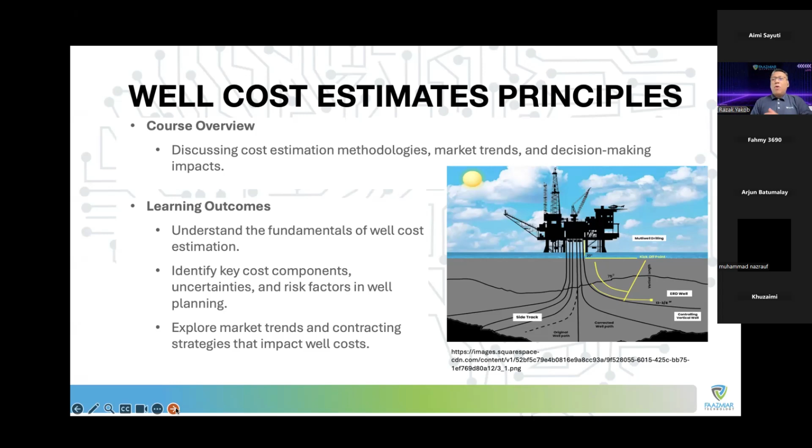Because well planning, you will provide the time, and inside the time, it basically will equate to the cost itself. So we'll explore the market trends and also the contracting strategies. So for you guys, the proposal engineer, this is actually very much related. And I hope all of you will benefit from this 2 hour session.

This is what we're gonna be covering: the necessity and complexity of the well cost, the components, and the method and decision making, as well as what basically is the trends that we have right now on the well cost. And then hopefully all of you can actually benefit from this.

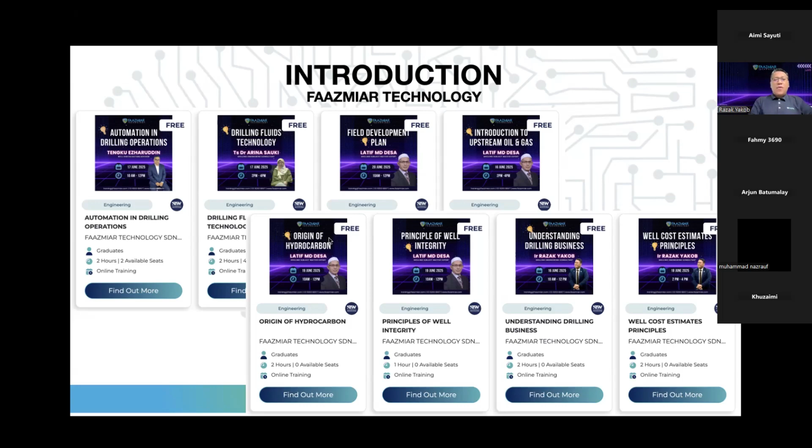We also have introduction to upstream oil and gas, origin of hydrocarbon. So if you would like to know what's going on with the upstream industry of oil and gas, here is all the availability of knowledge that you can actually get. Of course, we have the principle of well integrity. I think one of you, Nair, is very much related to this particular topic. Then, of course, I did the Monday session on understanding the drilling business, as well as right now we are having the well cost estimate principles. I hope all of you will benefit from these sessions that Faazmiar Technology is actually providing you.

I do realize as well, it's like 2 o'clock, 2 plus PM, and it is time after your lunch, and everyone is kind of like a bit sleepy. So I do understand that. But we will do a 5 minutes break at 3 o'clock so that all of you can actually rest a little bit. But from now until 4 o'clock, we try to finish up the items that we cover over here.

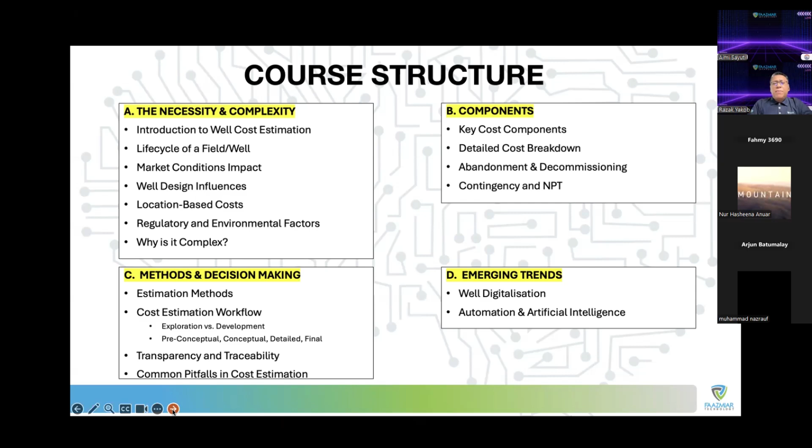All right, let us take a look at the necessity and also the complexity of the well cost estimates. First and foremost, why is it important? Why is accurate cost estimation important?

Because as I mentioned just now, whatever number you put inside your cost estimates will translate into whether the project actually flies or not, whether the project will be sanctioned or not. If you simply put in any number that you pluck from the air without justification, and if your reviewer didn't question you, and the number actually went out there and the project is sanctioned, then you probably will have issues later trying to justify if your cost didn't actually meet the actual work that has been done.

Because, as I mentioned, whenever you require additional cost to supplement your budgeted approved cost, that means you have not done something right at the planning stage, at the calculation stage. Or it could be an outside factor, market trend, or it could be an operational matter, where during the operation some issues occur.

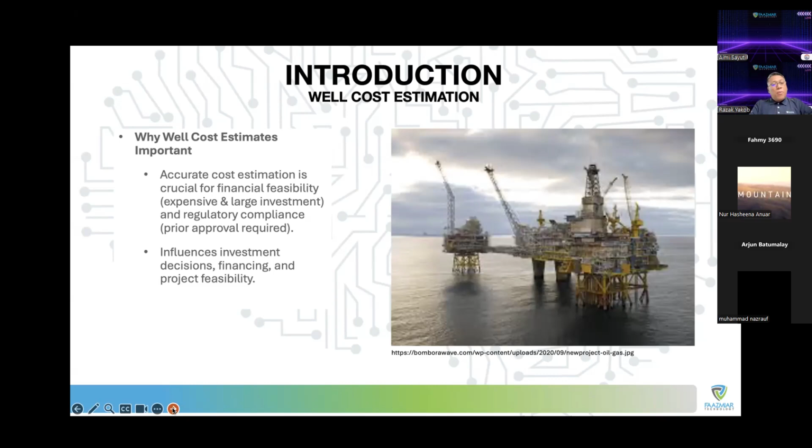Whenever they do a project, it is called a strategic project, because if we didn't do that project, then the country would not have enough supply of oil or gas. Then they would face issues of energy supply. Realize the importance of our work over here in oil and gas — we basically generate the energy for the use of this country and the rest of the world.

That's the reason why it's important that you realize this is the trend globally, and this is also the trend over in Malaysia. So if you are in the oil and gas industry, the industry is not dying, but in the next 20 to 30 years, we are still needed. Why is that?

Because renewable energy is not advancing as rapidly as what we want. What kind of renewable energy do we have over in Malaysia? Solar energy, hydro - those are very limited. How much space can we have to put all the solar panels in order for us to get enough energy to power up the nation? Not enough, not sufficient enough for us to actually rely on renewable energy. So that's how important our work is.

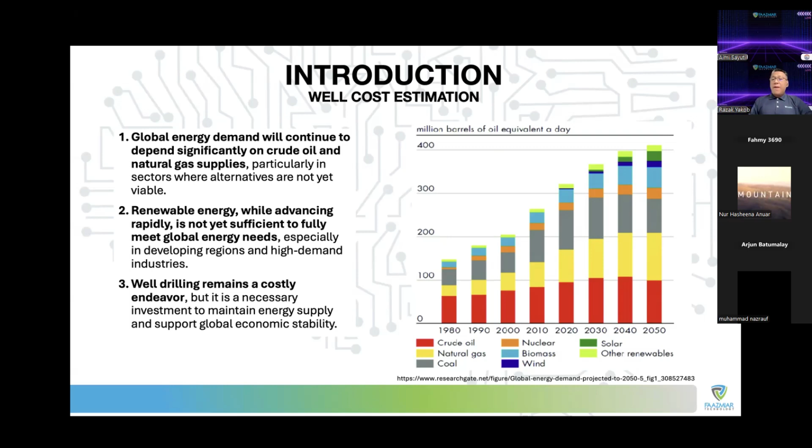That's the reason why drilling and well cost is still very much relevant in the next 20 to 30 years. All right, so right now I would like to introduce to you a little bit about the life cycle of a field. Where does this oil and gas come from?

It comes from the exploration, drilling, completion, production, and also abandonment. All of this happens in a well or a field itself. So if you take a look from the well proposal, where we go in and drill the well for information - once we gain the information, then we will figure out whether that particular field is actually economically feasible to be developed.

And if it is, then the field development plan will tell us, okay, let's develop this particular field - we need 5 platforms over there, one mother platform, and so on and so forth. And we go into the drilling for development wells, and then it goes into production. After 20 years or 30 years, then we will go into well intervention or workover and well services so that we can help the oil flow.

But if you need more information, probably you can go over to our YouTube, because this was covered in the Monday session, where we talk a little bit more about how each one of these wells is produced, and then repaired, and then it will continue to produce, and then until the tertiary drive or tertiary recovery, where we do enhanced oil recovery, where we try to push the oil up to the surface. Very interesting stuff - if you missed it, go over to our YouTube, and then you will be able to see more about this information.

Okay, and understand a little bit as well - before we go into the heart of the well cost, you need to understand a little bit about the life cycle of the field, and then the phases, design stages, the well phases, the well life cycle, because each of these phases, stages, and the life cycle basically impact how you would want to estimate that particular well cost.

So very important, at the different stages: conceptual, detail, and final. These design stages are differently calculated. Even at the well phases, it is differently looked at, because items over there will not be the same from one phase to the other.

You can actually take a template and make changes over there, but it will not be enough, because each well is unique, as much as face recognition on the phone, where all faces are unique. The same thing applies to well costs - they are very much unique to that particular well. You will not have exact numbers and exact conditions.

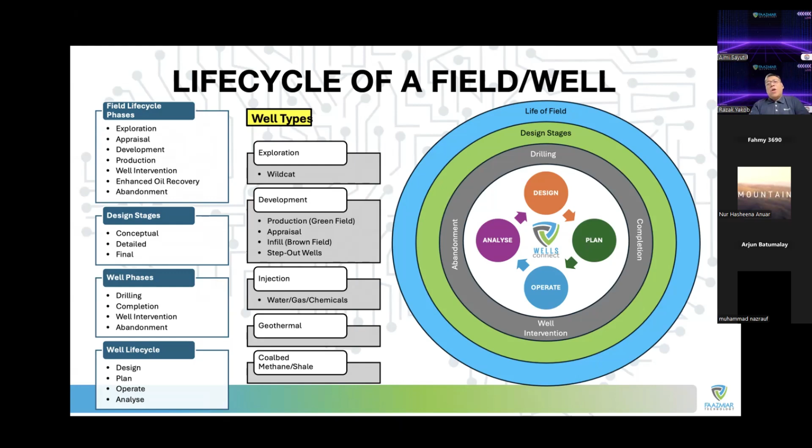So you will allocate some formation evaluation over there, then everyone will be happy. Don't tell me last minute that you suddenly want that formation evaluation - then I would just say, don't you plan your work? You don't plan? That is really important. So whenever we do something, it is based on the bigger plan, and this bigger plan is called the field development plan.

All right, let's take a look at the market condition impact. This is very, very interesting - many people actually ask me this as well. Right now the oil price is down, so does that mean that I stop drilling, or do I want to go and drill? That really depends, that really depends.

Later you will realize market trends itself does not really tell you whether to go out and drill or not, because you will need to know what is your company's situation at that particular time, what is their economic standing at that time, because sometimes whenever the contract is signed, it is signed for the next 3 years or 5 years ahead of time, and the cost over there is stuck for the next 3 to 5 years.

How does that actually work? Whatever you drill, you produce and then sell at the market price. But whenever you want to plan, drill, and pay your invoices, you have to pay at the time where you sign the contract. You see the complexity there.

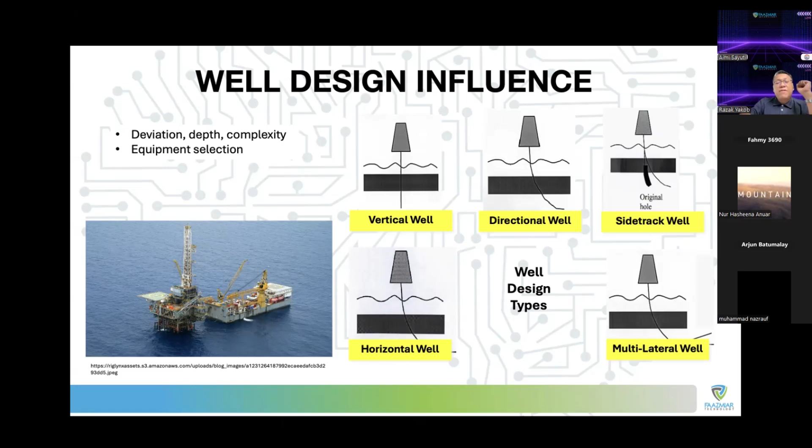In the oil and gas industry, whenever you do a development project like this, it costs billions of dollars, and drilling actually takes quite a big portion of that. In a big development where you have a lot more facilities from the mother platform and so on, well costs can apportion to at least 30% or 35%. But if you're doing a very small development, well costs sometimes become 50, 60% of the total project cost. That's how significant well cost estimates are.

So do realize that. And location-based - where do you want to do this? In Malaysia, it is actually quite simple because most of our developments are offshore. However, we do have some over in the swamp area, in the Sarawak area, and we also have deep sea in the Sabah area. So each one of these locations is different in terms of how you want to estimate costs.

In some of the projects I have worked on, for example in the middle of the desert in Algeria, whenever you want to conduct drilling over there, you have to know - is there a road that goes along with it? Is there nomad people over there who basically move from one place to another? Will they come over and steal your stuff? Because drilling equipment is all very expensive.

And then also, do you have wildlife over in the desert as well? Are you going to feed this wildlife? Because you have all of the supplies, and then you need to throw away your trash - you are changing the environment. And how is that written in the guidelines of that particular country? You need to know, because that will need to go into your well cost estimates.

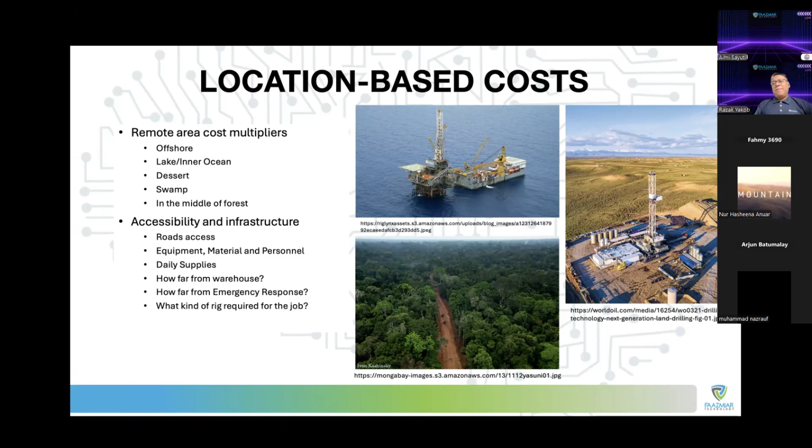The more complex all of these operations are that you need to do, the more cost that you will have. And sometimes you also have to pay off the people around that area, the villages around that area, because your project has to work. So all of these costs will need to go into your cost estimates. It's very complex over there.

And also, one item I would like to go over before we take a break is regulatory and environmental factors, as I mentioned just now. In each country there are different guidelines, different requirements. In Malaysia, you have governing standards like PPGUA, so you must know what is inside there. And then in each project you will do an EIA, or environmental impact assessment. All of this will need to go into your cost.

Drilling permits - whenever you want to drill, you need a permit. You need abandonment approval - how basically are you going to leave the place? And then all of this has different layers. National and local regulation also plays a very important part. Safety and HSE requirements, data reporting obligations.

Some of this - data reporting obligation - people say, oh, you just report, no problem. No, every single thing that you do involves costs. It's not free. Nothing in the oil and gas industry is actually free, other than my smile. That's why people like to work with me, because I always give my smile for free.

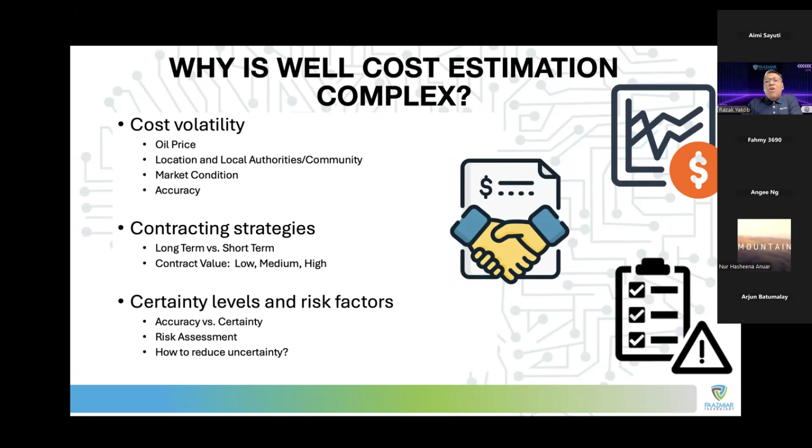So that is something very interesting. Probably we can actually have another topic in the future about the contracting strategies itself. Yeah, probably we can do that. Right, thank you so much for the question.

Now let's take a look at the component.

We only have 30 minutes to go, so we will try to finish as much as possible, and try to finish the entire thing. I probably won't be able to go in depth with this item, but I hope it has already triggered your mind on how to think, because in any classes I do with universities, since I am a part-time lecturer as well...

In any of these classes, what I tell them is that things you can find on ChatGPT, don't come and search for me. You can go and ask ChatGPT. But if you would like my opinion on certain things, then you can come over to me. Because I come with opinions, I don't give out facts, since all of that you can actually find on ChatGPT or Google.

All right, key cost components. All of these items go in here, like drilling and completion, tangibles, supplies, third-party services, and logistics, vessels. Vessels is one of the biggest costs. Don't underestimate the vessel cost, because they can be really, really expensive. And once you've chartered a certain vessel, there's no turning back. If your operations are delayed, you still have to pay for the vessel, because it's charged on a daily basis.

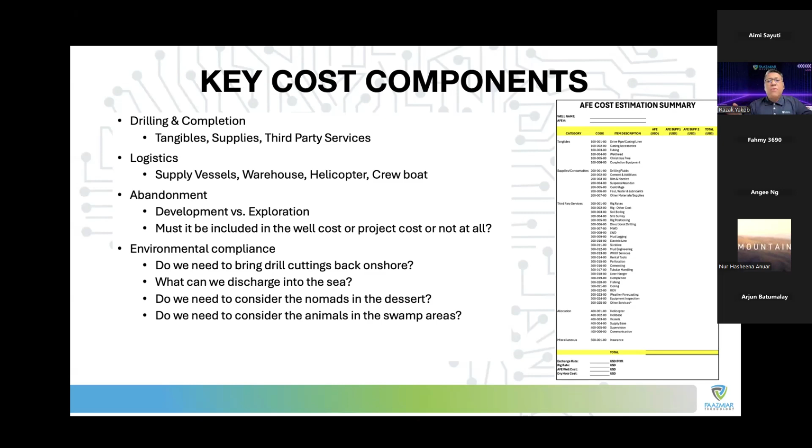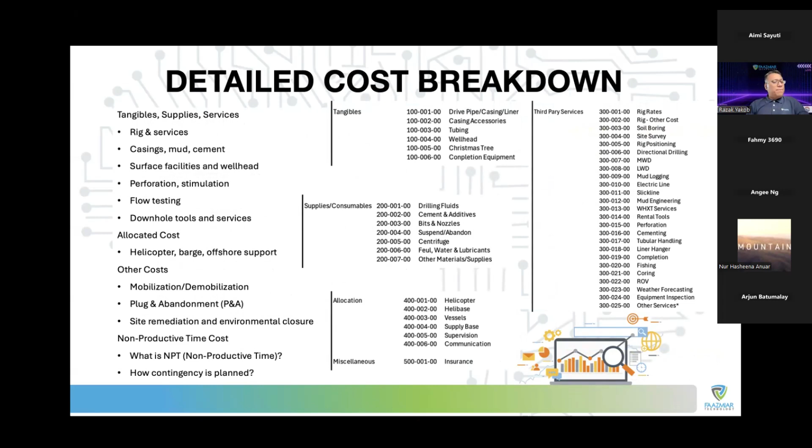Okay, let's move on. Detailed cost breakdown over here. We already explained a little bit of what goes on in the previous items. I will skip this one and talk a bit about abandonment and decommissioning, because this is something you will probably have more issues to handle or think about in the future.

But again, each abandonment cost is very different. It can go really low or really high, because of the variation in the design of the abandonment, as well as the condition of the well after it has been produced for 30, 40, 50, sometimes 60 years. Some wells in Malaysia, like Angsi and Guntung, have been producing for more than 40 years.

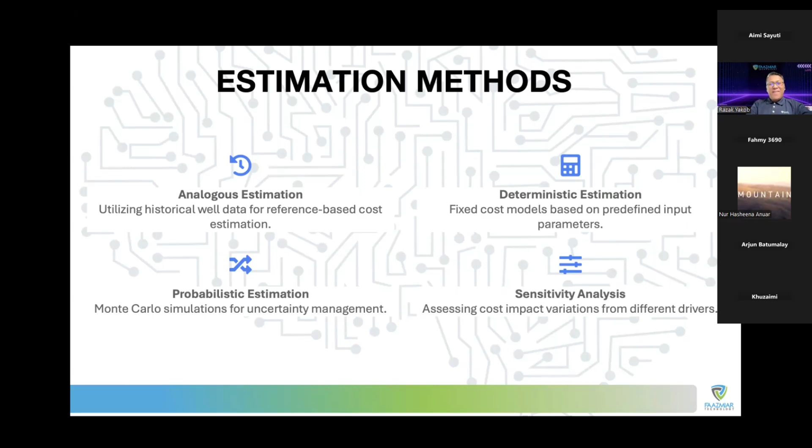So sensitivity analysis, you need to pick one item at a time in order for you to see how much difference it will give in your cost. Very interesting, isn't it? Let's just take a look.

Okay, cost estimation workflow. We have data gathering, estimate approval, and so on and so forth. What people don't realize over there is the reconciliation.

Reconciliation is whenever you have already completed the well, after 6 months, all the invoices have already come in, and then you will need to justify why your cost has already gone overboard, or lesser, or much lesser than it's supposed to be. Justify that. That's the reason why I said documentation is so important.

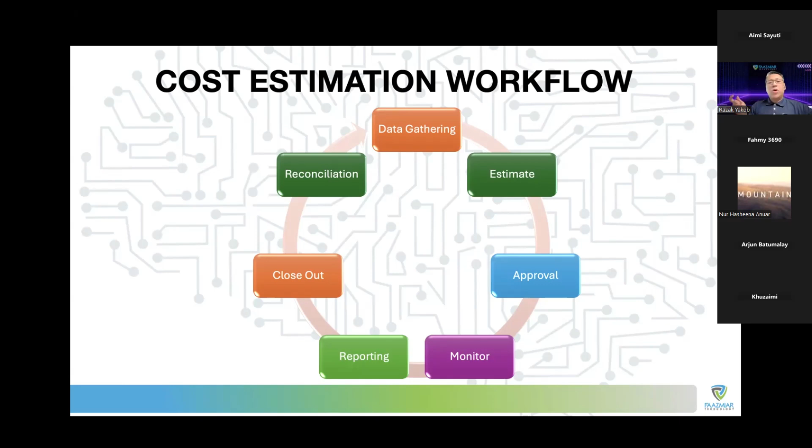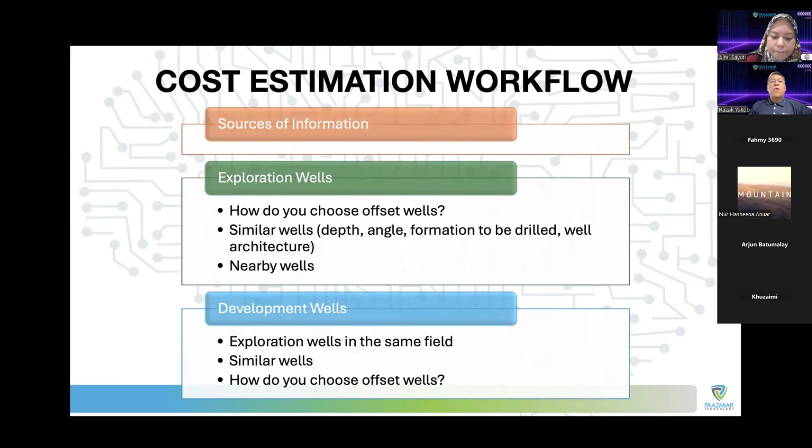Okay, sources of information that you will get: exploration well. How do you want to choose offset wells? And then development wells will have different ways of estimating, and all of this information will come together.

Tell me how much it will cost. I don't have much information inside there. So how much time do you want to give me? Oh, you have until 4 o'clock today. And then I say, so you give me 7 minutes, I give you the numbers right now, lah.

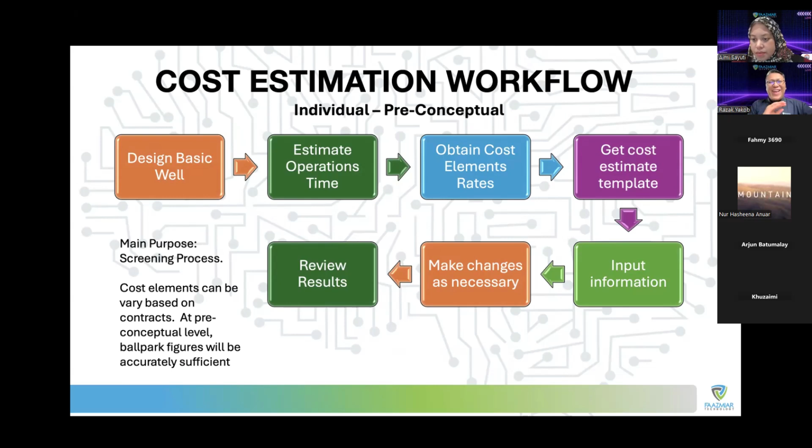Jot down, ah, because whenever you request certain numbers, you need to give me time. If you don't give me time, then I will give you an absolutely stupid number. Okay, so these are the processes that you have to go through.

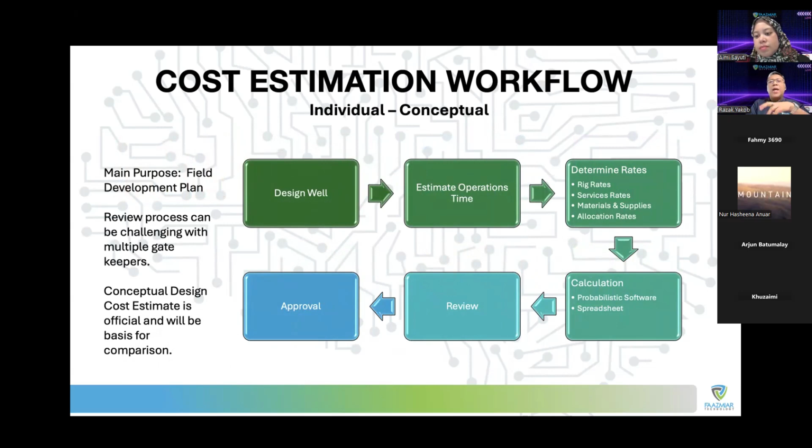And then individual well for conceptual, the same thing as well. Later you can go in and read through. Yeah, there's a whole lot of things over here.

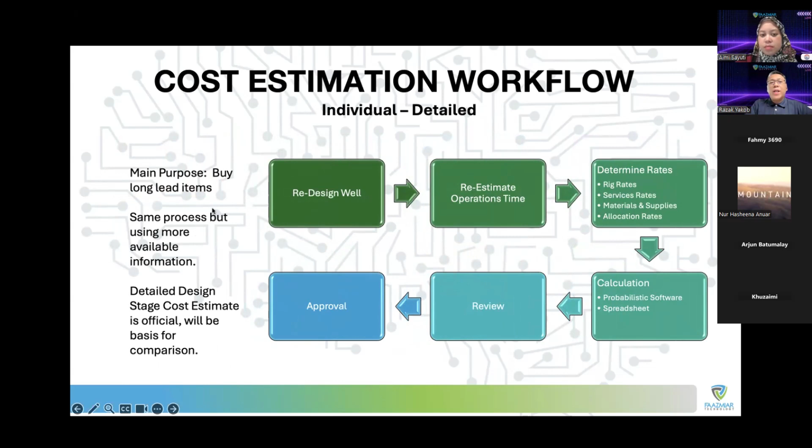Individual detail. So different phases of design will have different ways of doing things. Realize, buy long lead items. Long lead items, things that will take 1 year, 1.5 years to actually arrive after you put out an order.

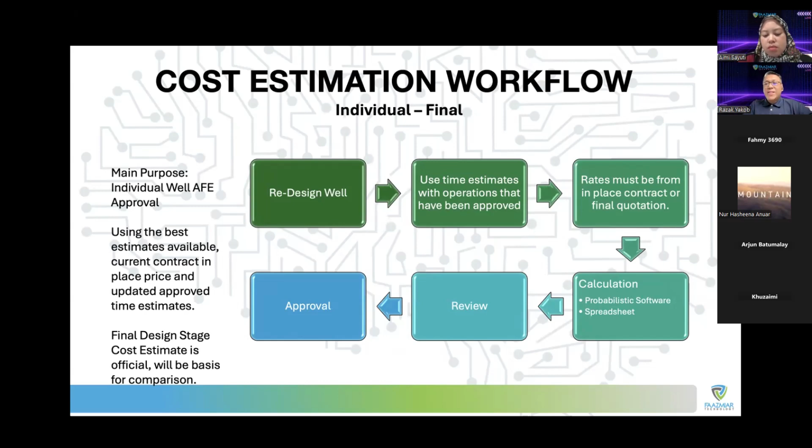So final, over here where you will have individual well, AFE, authorization for expenditure. Of course, in conceptual, this is your summary of the workflow of why basically you want to do this concept. And transparency and traceability, very, very important.

Authorization for expenditure is where your management will sign off, and your company's partner will sign off as well. It's like: okay, you can spend this much money to drill your well. But if you don't have enough, you have to tell me before the well is completed, or else you'll have to pay yourself.

So you need to make sure you request for money before it runs out, and you have to ask the original person who signed it off, because in the first round you already told them your best estimate. If after 2 months you have to go back to the same person asking for more money, you lose face, isn't it? That's the reason why you need to have all the justification in.

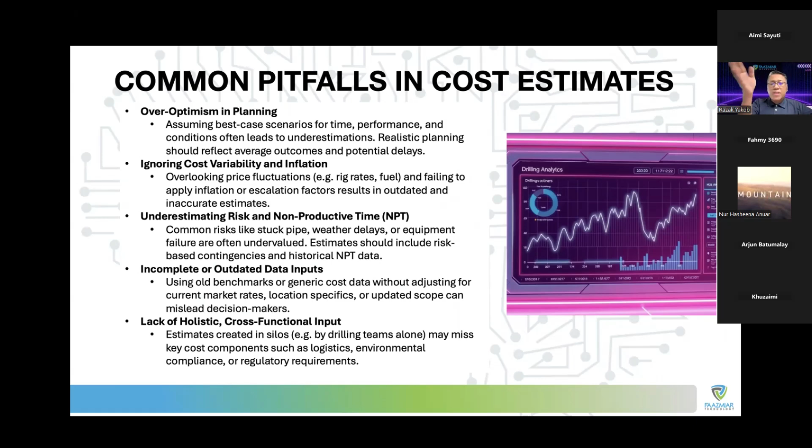Lack of holistic view - you don't see the big picture, you don't consider other people. Whenever you do your well cost estimate, you don't simply just look at your well cost. You need to take a look as well at what your friends in reservoir geology and so on are doing, because all of this is cross-functional input.

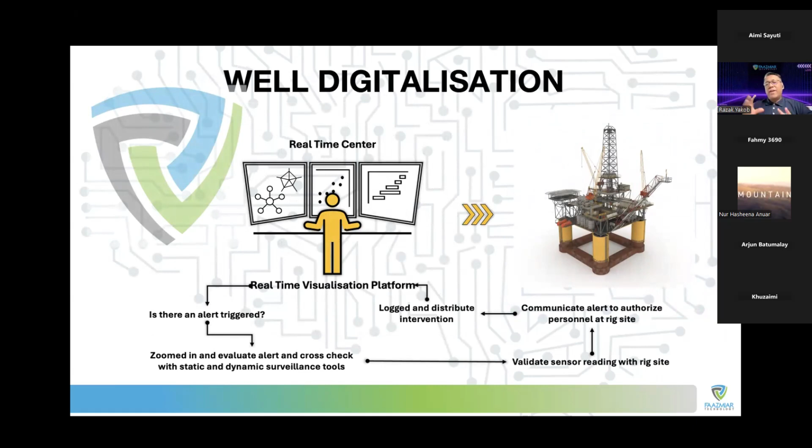All right, emerging trends. Yes, well digitalization, where you can see all of that. Again, this well cost is where you will be able to see the difference, how it evolves and so on and so forth. So well digitalization will help you to do that.

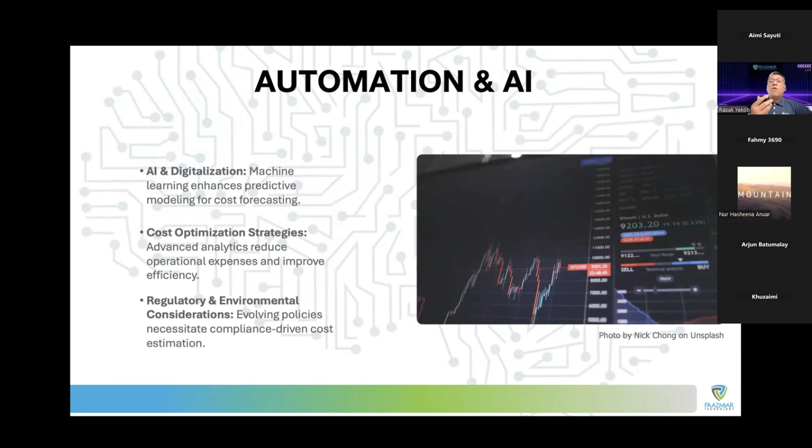Automation - previously you probably would have to go to the company's library in order to get all the well files from 5, 10 years ago. But right now, all you have to do is just type in a few words and the database will spell out all of the information that you need. So all of this is really important.

I do not want to take a single minute more of the time allocated to me. So the important things we put together here: accurate estimation is crucial for sustainable field development, because you need advanced techniques to improve the economics of your particular well, so you need to consider all of that in your cost estimate. Proactive abandonment - you need to put in all the abandonment costs, so that your entire project cost will not just be whatever you have right now.

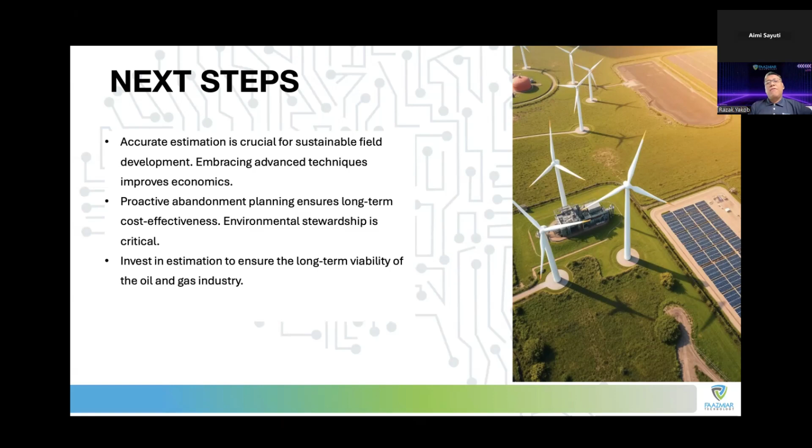So invest in estimation - you need to spend time thinking through everything, because I cannot help you in that area, since you are best at your own in your own project. You basically need to think about what is most important for your particular project and put it in there.

Let me see if there are any questions that you have in here. Okay, back to you, Aimi.